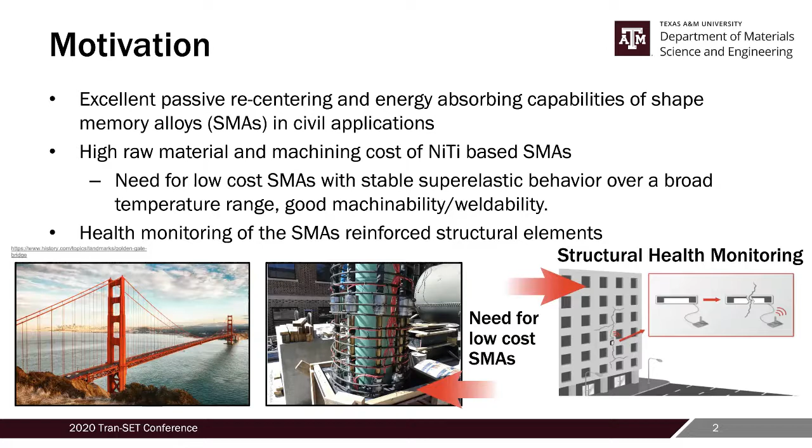What we want to do is develop low-cost, multifunctional, high-strength, and self-sensing wires, braided cables, and large diameter bars, because in structural applications, most of the time common materials are cables or large diameter rods. So we want to scale up iron-based SMAs.

We want to demonstrate the self-sensing capability of iron SMAs using this magnetization change. In conventional nickel titanium, you cannot get this magnetization change, and therefore it's not suitable for structural health monitoring applications.

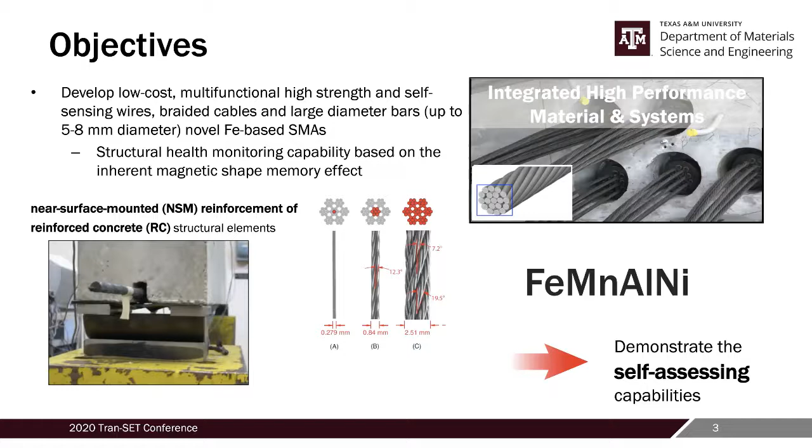Before I start, I want to quickly explain how SMAs work. Shape memory alloys can recover a large amount of deformation due to superelasticity. This superelasticity is an elastic response of a material to an applied stress, and it happens by a phase transformation from two solid phases—a solid to solid phase transformation. The material transforms from austenite to martensite. When you release the load, the material goes back to its original state.

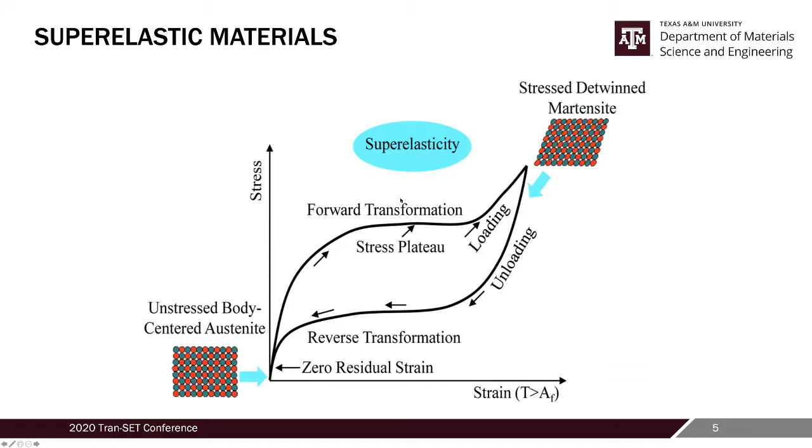There are lots of different iron-based SMAs, but for this project we selected iron manganese aluminum nickel SMA. The reason is because, in this graph on the left, it shows the superelastic stress levels versus temperature. Superelastic stress levels correspond to the stress at which this material transforms.

Here you can see iron, nickel, cobalt, aluminum, tantalum, boron, or copper, aluminum, manganese, or nickel titanium alloys. But our composition here, shown in the red line, is iron manganese aluminum nickel alloy.

As you can see, as you increase the temperature, the critical stress for superelastic transformation does not increase as much. This is critical, especially for civil engineering or transportation applications, especially in structures in extreme environments, because once you build your material, you don't want its properties to change due to different temperatures. This graph shows iron SMAs actually have higher strength and strain levels compared to nickel titanium and copper manganese SMAs.

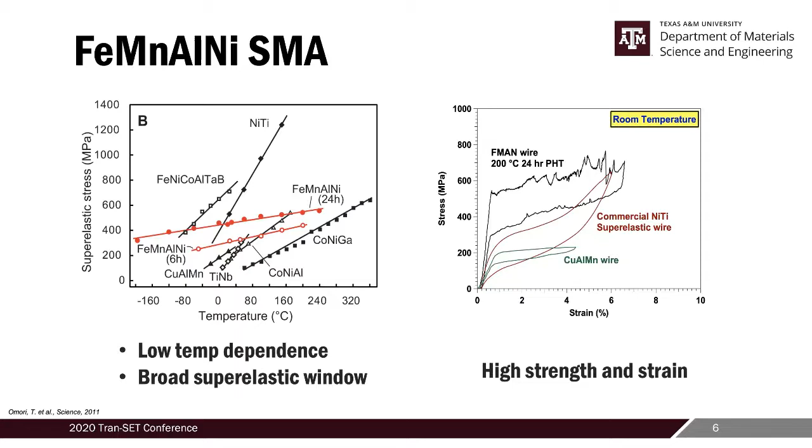However, to get a superelastic response from an iron-based SMA, you need three things. The first, which is extremely important, is the grain size. In this graph on top, you see a microstructure of a material, and these little areas we call grains. What you want to do is increase the grain size of the material through heat treatments, abnormal grain growth heat treatments.

If you have a small grain size alloy, you don't get that superelastic response I showed you earlier, which is typical to SMAs. However, if you increase the grain size of an alloy such that the grain size is higher than the smallest dimension of the component—this is important—you want your grain size to be higher than the smallest dimension of the component, whether it's bars or wires.

Then you start to see that superelastic response. So it's extremely important that you manipulate the microstructure and obtain the correct microstructure.

Also, these materials are very anisotropic. That means if the orientation of the grains is different, you get different response from the material. If your grains are oriented in the 1-2-3 direction, you get this nice superelastic response. In the 1-0-0 direction, you get more hysteretic response.

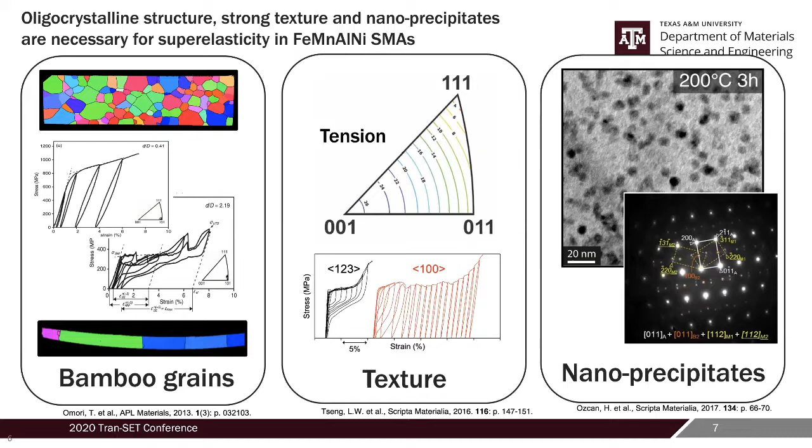The last step is, after you grow your grains, you want to strengthen your material, and you achieve this by inducing nano-precipitates in the material through low temperature aging. So in my talk, I'm going to talk about how we can develop iron-based SMA wires and then switch to cables and bars.

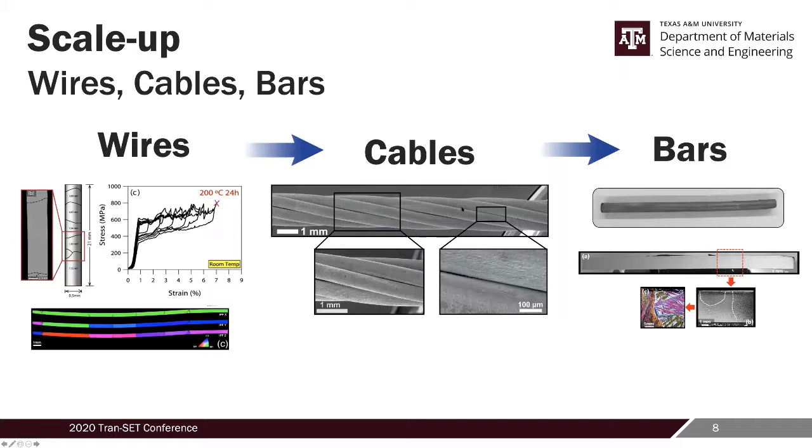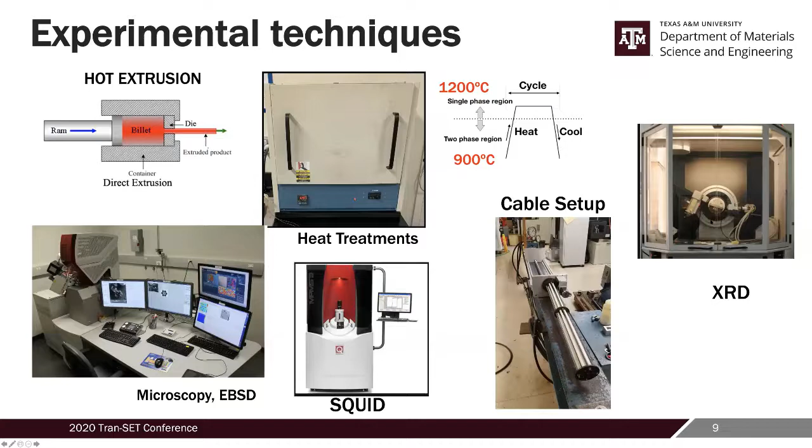Throughout our experiments, we use different experimental techniques. We use hot extrusion, microscopy or EBSD to look at grain orientation, furnaces to do our heat treatments, and to measure the magnetization change we used a SQUID. This is the cable setup that we built with my undergrads in our lab to fabricate the iron-based SMA cables, and again XRD for texture measurements.

So let's look at how wires work. If you want to make an iron-based SMA wire, this is the processing technique shown in the left graph. We had to extrude our material, then anneal it, and then do wire drawing at room temperature. This part here is where we induce the grain growth.

We repeatedly heated up and cooled down the material from 900 degrees C to 1200 degrees C. When you repeat this heat treatment a couple times, you get grain growth. After that, you need to solution heat treat your material, and to strengthen it you need to do aging heat treatments. In this case, we did 200 degrees C for different amounts of time.

After that grain growth, we were able to increase the grain size up to 40 millimeters in 0.5 millimeter wires. But before I talk about the larger diameters, of course this wire is very small for civil engineering applications.

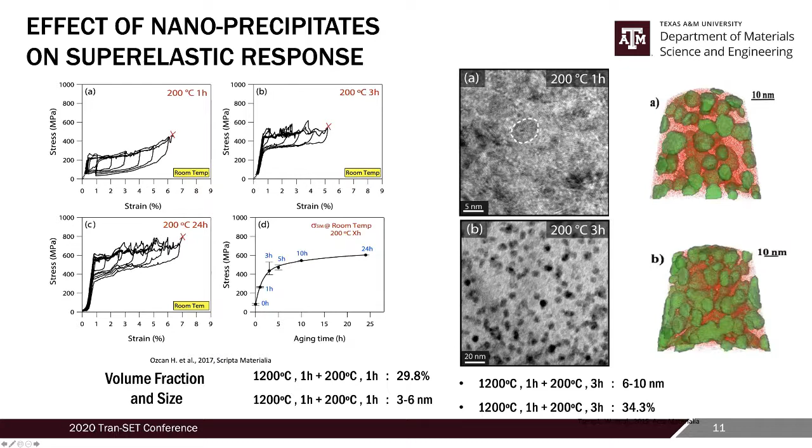But to get insight on the material properties, we looked at the effect of nanoprecipitates on the superelastic response. This graph shows that you can manipulate the superelastic stress levels, the stress at which your material transforms, by changing the aging heat treatment. If you change it from 1 hour to 24 hours, you can control these stress levels.

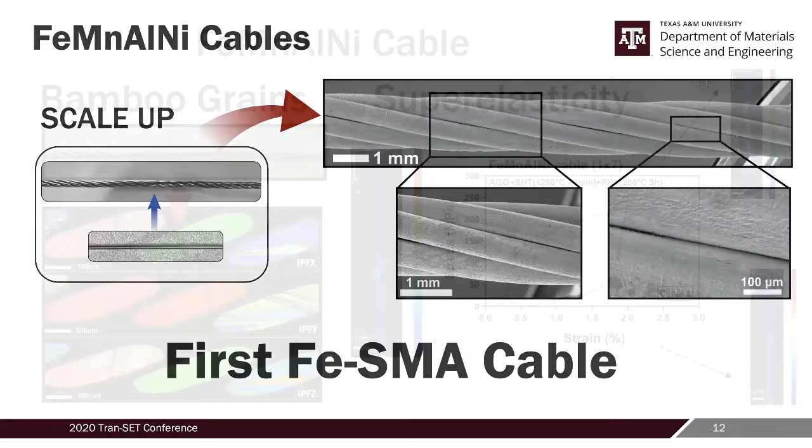After we developed the small diameter wires, we developed the first iron-based SMA cable that shows superelasticity in the literature, using iron-manganese-aluminum-nickel cables. Here on the right you can see an SEM graph of this cable. We used 7 different cables and braided them together, fabricating this using the setup I showed you earlier. Again, like I said, the microstructure is very important.

We apply heat treatments to these materials, and this graph shows the microstructure of a cable. You can see the grain size is higher than the smallest dimension of the component. When we tested the material, we were able to obtain a superelastic response.

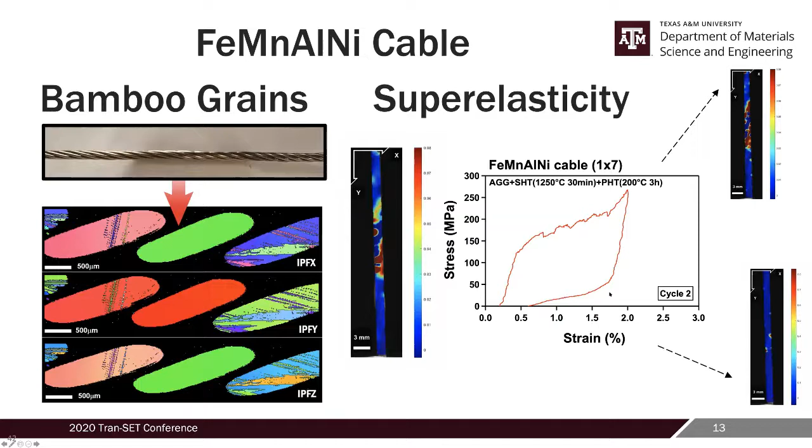After that, we worked on 2 millimeter diameter bars and 5 millimeter diameter bars. Again, we applied this abnormal grain growth heat treatment to these materials and repeated it 5 times from room temperature to 1200 degrees C, and we were able to grow the grains in these bars too.

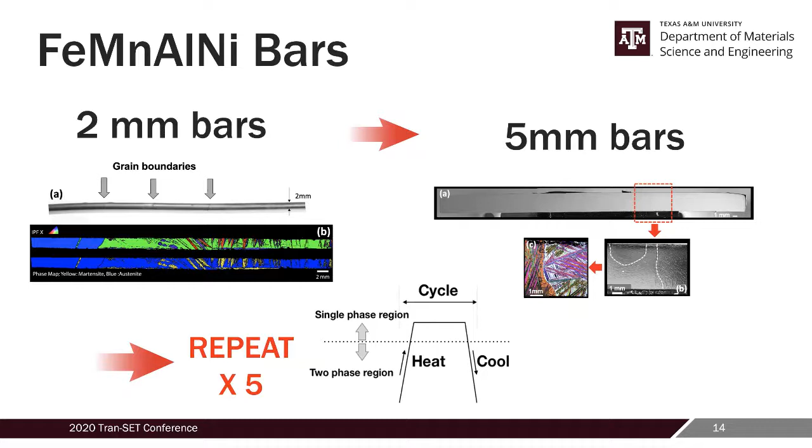But again, this is very important. This heat treatment is very important because you need to optimize it specific to your material. As the dimension of the component increases, the heating/cooling parameters and the microstructure will change, so you need to optimize the heat treatments as you scale up the material.

We also developed another alloy, adding some titanium into iron-manganese-aluminum-nickel. In this material, you can get much faster grain growth rates if you apply these heat treatment procedures. In this case, for iron-manganese-aluminum-nickel-titanium, we changed our heat treatment parameters to cycle between 900 C and 1200 C.

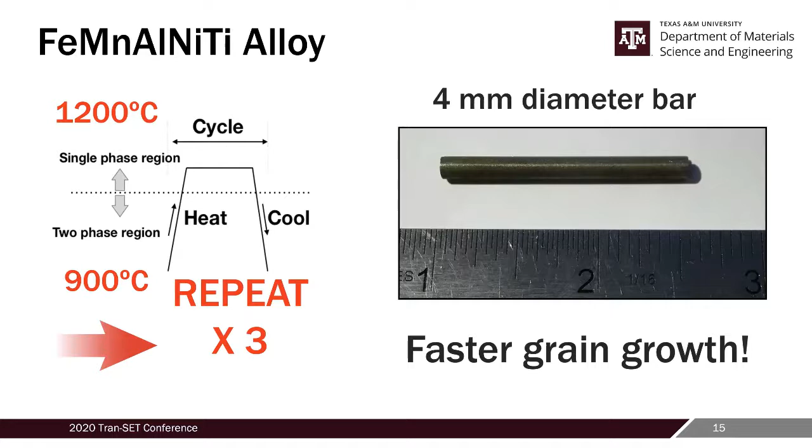When you do that 3 times, you can get a single crystal in 4 millimeter diameter bars. Here you can see samples that we heat treated. When we measured using XRD or EBSD, using 2 different techniques, we saw that this material is single crystal.

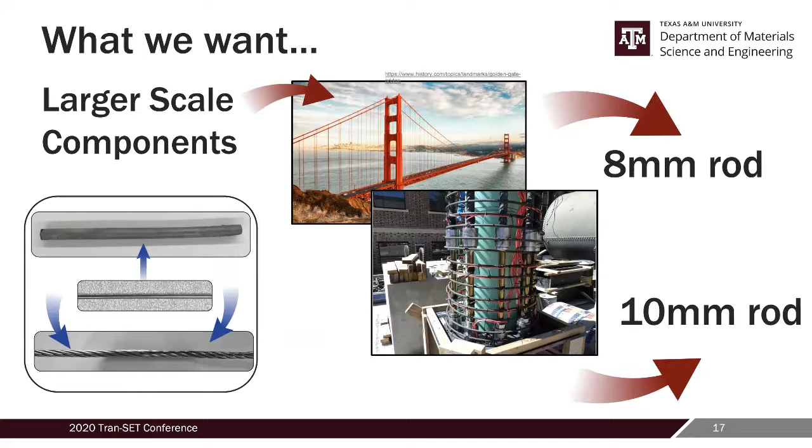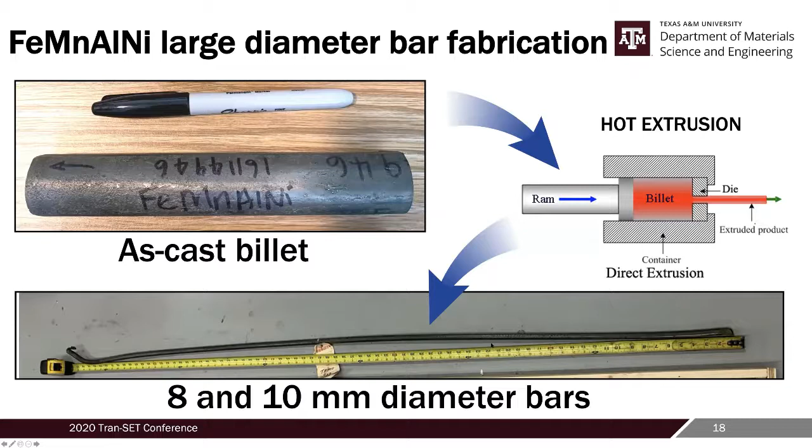In the future, what we want is much larger diameter bars, 8 to 10 millimeter rods. So in iron manganese aluminum nickel and iron manganese aluminum nickel titanium, we fabricated these bars. You take this as-cast billet and hot extrude it at 900 degrees C, and you can get 8 to 10 millimeter bars. After that, you need to apply heat treatments again, which are very critical.

In iron manganese aluminum nickel titanium 8 millimeter bar, after cycling this material 3 times between 900 C and 1200 degrees C, you can get large grains. We didn't observe any grain boundaries after these heat treatments. We are still continuing this work.

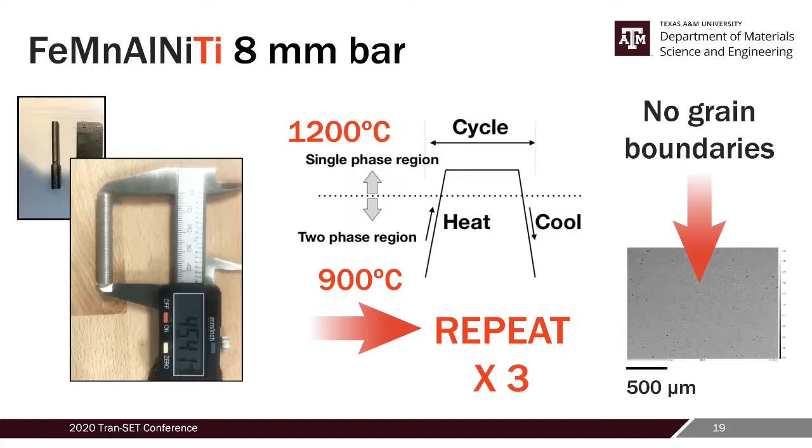Let's look at the self-sensing capabilities of iron-based SMAs. These materials show a magnetization change during phase transformation. So we wanted to take advantage of this property and build self-sensing sensors out of these materials.

The austenite and martensite have different magnetization levels. For example, you load your material and it transforms to martensite, and when you unload, you go back to austenite. However, if you load to, in this case, 5 or 6% strain, you get some irrecoverable strain.

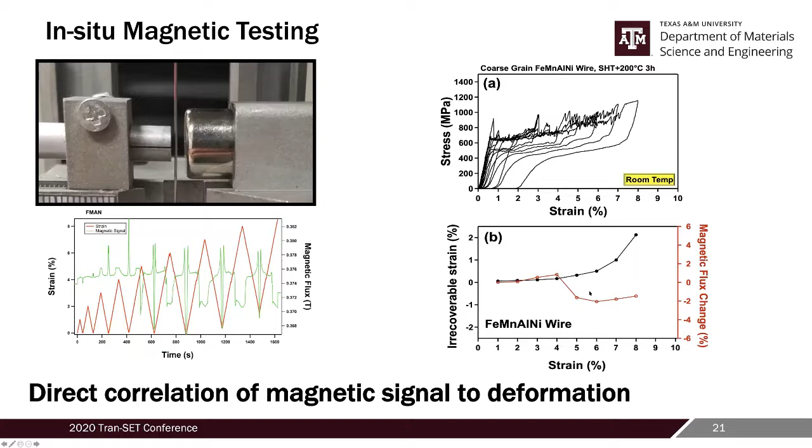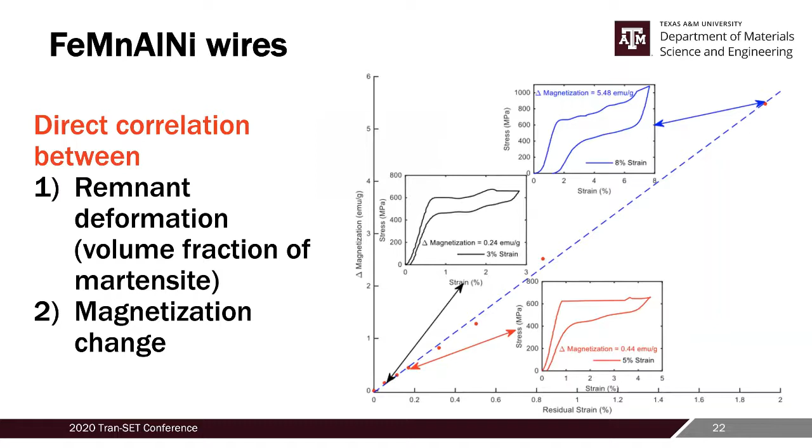Here we show this change using in-situ experiments. We established a direct correlation between this remnant deformation, which is the volume fraction of martensite in your material, and the magnetization change. Using this property, you can use these materials as self-sensing elements in civil engineering applications.

We also tested iron manganese aluminum nickel titanium specimens. After abnormal grain growth, we didn't observe any grain boundaries, meaning we have single crystals, which we confirmed by measuring the gauge length in XRD.

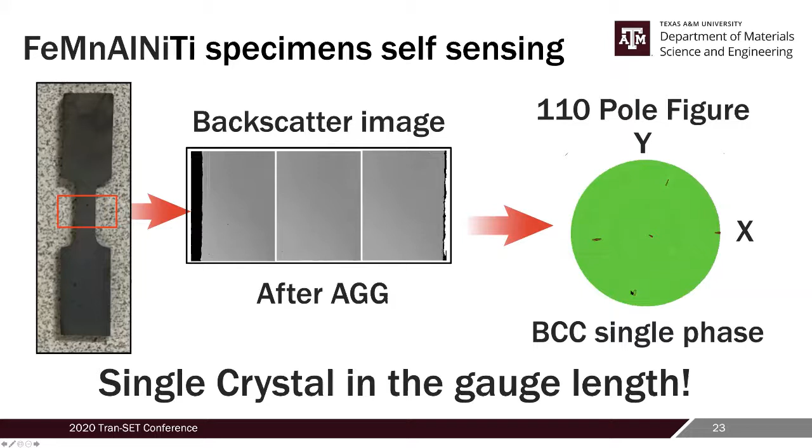We tested our sample. Here is how our sample looks. We designed this in SolidWorks, and this is our setup, where we measure the magnetic change during the superelastic response.

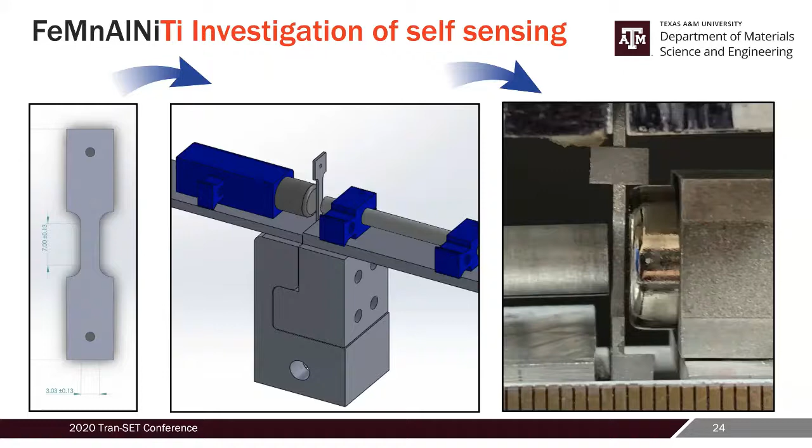The blue line represents the stress, and the red line represents the magnetic signal. As this material deforms, you get a change in the magnetic signal. In this image, these lines represent martensite.

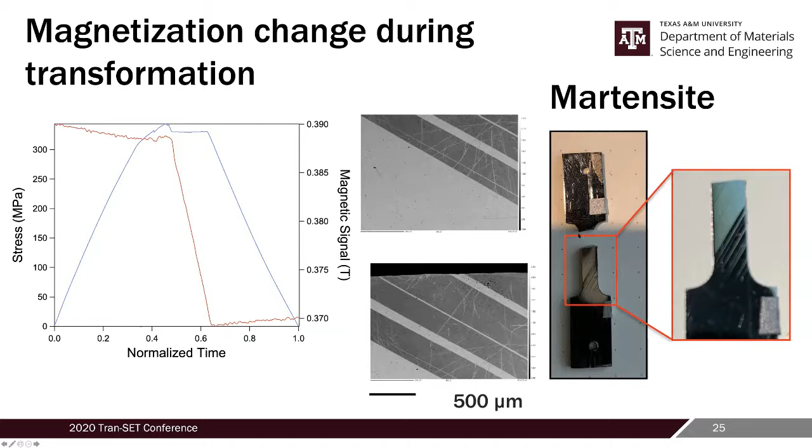The single crystal alloy transformed to martensite as shown in these images. We also established a direct correlation between remnant deformation and magnetization change in iron manganese aluminum nickel titanium alloys.